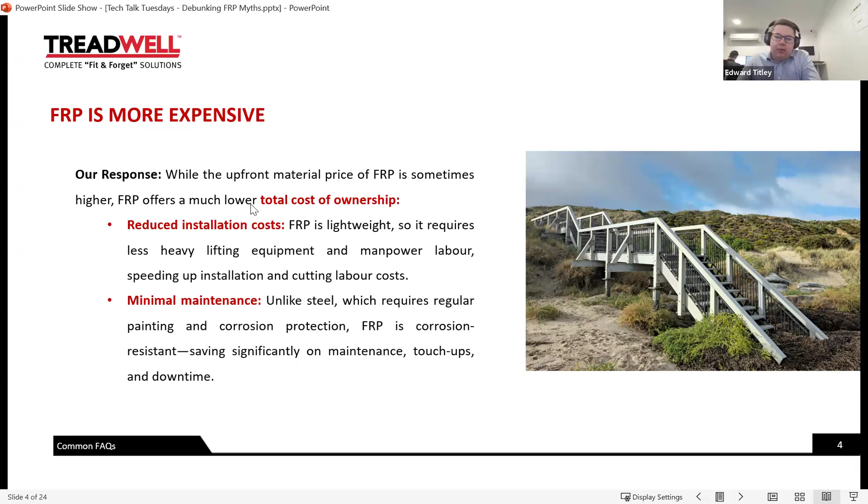The other aspect is the life cycle cost. For example, a steel structure needs a blast and paint maintenance regime. FRP doesn't need that, so you're saving over your life cycle. Just as a brief cost comparison, this is from some feedback we get from our clients. So start off with floor grating.

Feedback we get is FRP is often very competitive with hot dip galvanized steel. Something to note, occasionally FRP will not be able to do as large a span. In some instances it can. We have some products that will span equally or better than traditional steel grating products like an C325 mesh or something along those lines. However, in some instances you might have a slightly reduced span. So that's something to bear in mind, but the cost of the grating is typically very competitive, sometimes lower, sometimes a little bit higher, but typically pretty well in the ballpark.

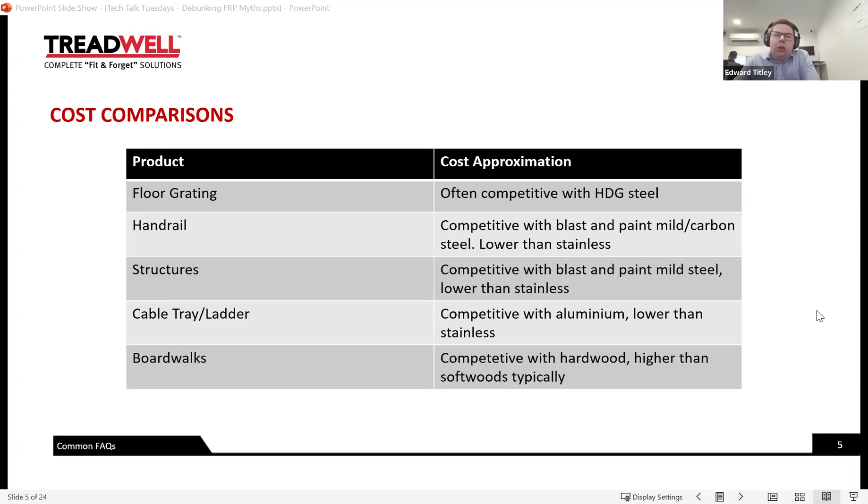Another question: all FRP is the same. This is something else we get. I use by way of an example our floor mesh products, yellow mesh, green mesh, they must be the same. They probably come from the same factory. Now, unfortunately, that's not the case, and green or yellow or grey or colours don't mean anything anymore in the industry.

Back when FRP was new, there were things you could determine from colour. Typically, yellow was the highest chemical resistance product. Green was more splash and spill type, or limited exposure, and then there were some more neutrals like your greys and charcoals and so on that were more for your public access type projects, so no chemical exposure.

However, that no longer really applies from the perspective that we've seen, where some clients require chemical resistance but have a specific colour in mind, whether it be to match something on site. We've done blues, reds, greens, yellows, or they want one of the standard colours like a charcoal or a dark grey. They need a chemical resistant product. So unfortunately, appearance is not something that can be relied on, especially in the current market with the way it's evolved, to determine what's in a product.

So our recommendation is that you have certain performance requirements around your product. Now, that could be by way of a specification, that could be by way of asking a supplier what their product meets as far as testing and compliance, and we'll have a bit of a look at that in the subsequent slides as far as what those compliance aspects might look like.

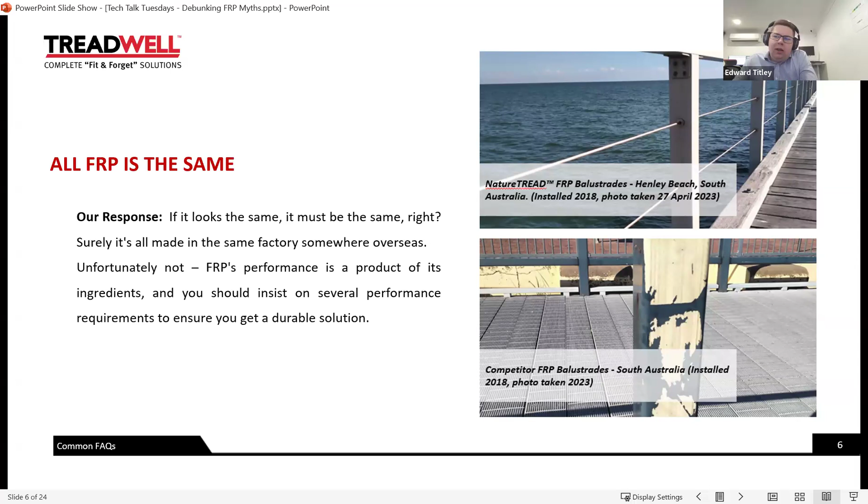The other thing is proper resin selection. Now, we've done a webinar on this, so I won't go into it in great detail today. We've also got a white paper on our website if you'd like to do a bit of reading around resins, different resin types, and why we need to specify some resins in some applications and other resins in other applications. But briefly, resin selection is like a coating spec for a steel structure.

If you've got a structure on a rooftop of a building, hot dip galvanized finish will give you a good durable structure. If you put that same structure in a sewage pump station or a wet well or a mine processing site or somewhere like that, that galvanized structure is not going to have a very good lifespan at all. So resin selection is the same idea.

Different resins are better in higher temperatures, lower temperatures. Different resin types will withstand different chemical exposures, acids and caustics, better than others. And different resin types also have differences around their fire performance as well. So we'd like to engage in discussion to get something that's fit for purpose for your project.

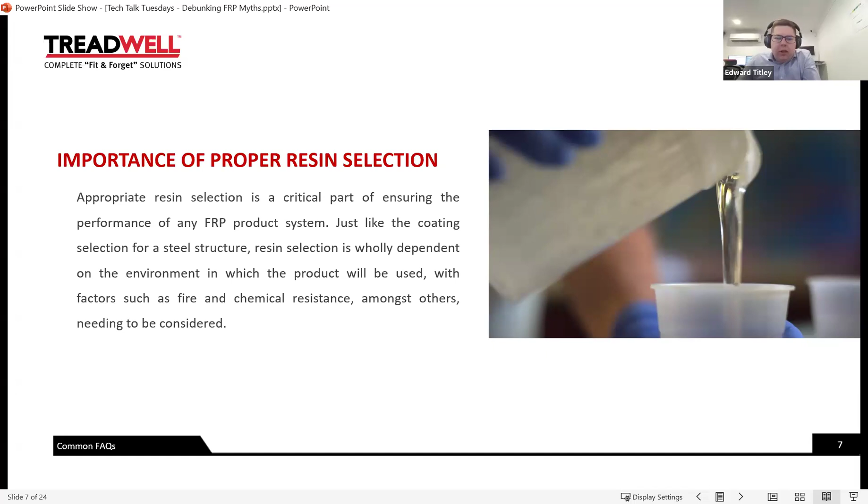But on performance criteria, we offer some specs. I won't read this one out to you, but it is available if anyone wants to drop us an email. Happy to work with you to get the right spec for your project. But some points for comparison, very briefly, a couple of points that we often include or suggest clients include in the specification. Colour pigmentation versus coating. So that's how your colour is obtained, whether it's a sprayed or applied coating, or whether it's integrated into the product.

Fire performance, there's a variety of fire testing. ASTM E84 is a very common one that's been used on FRP for a long time. More recently, we've seen demand for some other tests. AS1530 Part 3 is another one. And the National Construction Code refers to ISO 9239. So once again, happy to help with the applicable testing.

For example, 1530 Part 3 is a vertically oriented product test. So if you're using it as a cladding or a balustrade, that would be especially relevant. ISO 9239, which the National Construction Code references, is horizontal, so that's more applicable if you're doing flooring or walkway mesh or something like that. However, some certifiers will want to see both or use one or another for a means of comparison.

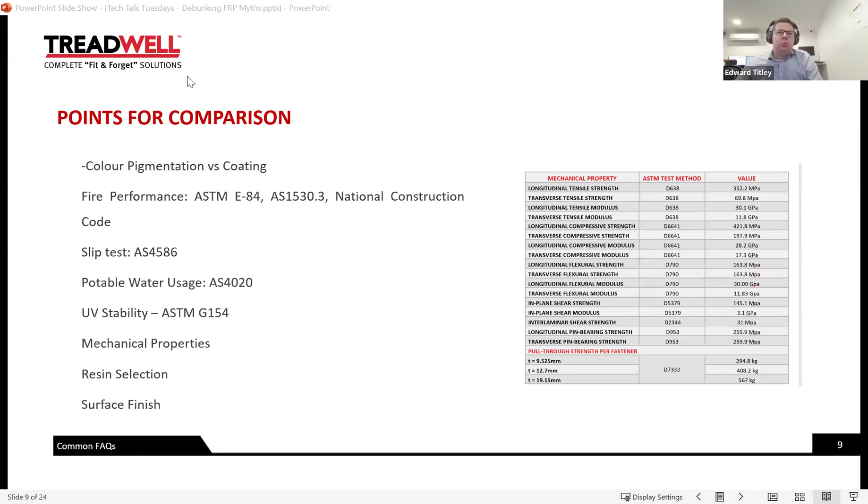Just bear with me. I'll just have a drink of water, I'm starting to lose my voice for some reason. And sorry, everyone. Hopefully that's a bit better.

And nearly to the end, this is the last question. FRP can't be cut on site. Now, I had this one recently, and I'm not quite sure where this has come from. Please excuse the voice. And this is not the case. FRP can be easily cut on site.

Sorry, this is quite embarrassing with the voice. FRP can be easily cut on site using standard hand tools. We've done a session on this previously as well, but typically circular saws, grinders, with diamond blades, or tungsten carbide drill bits.

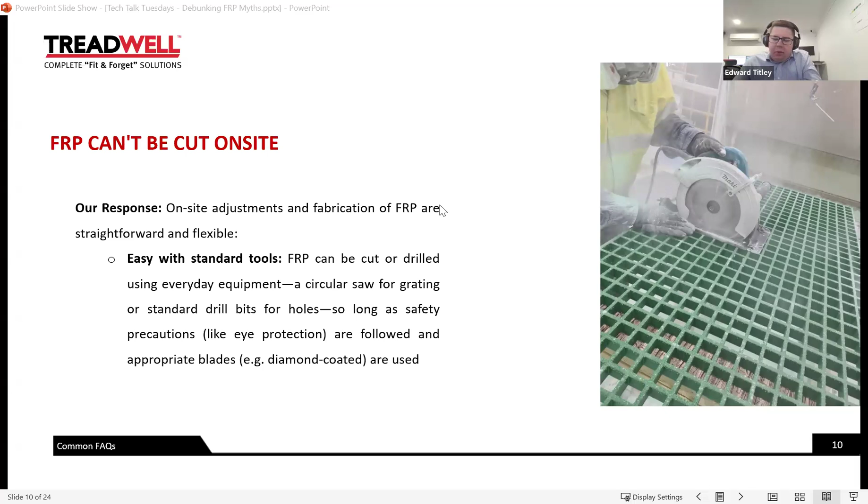And then the most important thing is the finishing. So there's a couple of processes which are recommended. Firstly is deburring. That's really for visual reasons, to give you a nice clean finished appearance. Should be done with sandpaper or a deburring tool, which is like a small abrasive bit to deburr holes and edges rapidly.

And then resealing. Now, resealing is probably the most important aspect. And there's two reasons we recommend to reseal. Firstly is a visual perspective. We recommend internal color pigments. When the product's cut, you'll see some lightening of the color. So by simply resealing with the resin treatment, you'll restore that original color, so it gives a nice depth and appearance back.

But secondly, FRP can be a little bit like the end grain of timber, in the sense that moisture can track through it if the cut edge is left untreated. So this just ensures that we don't see that moisture ingress, which gives us the best durability. So it's not going to immediately fail if you don't, but best practice for maximum durability, you should reseal cut edges.